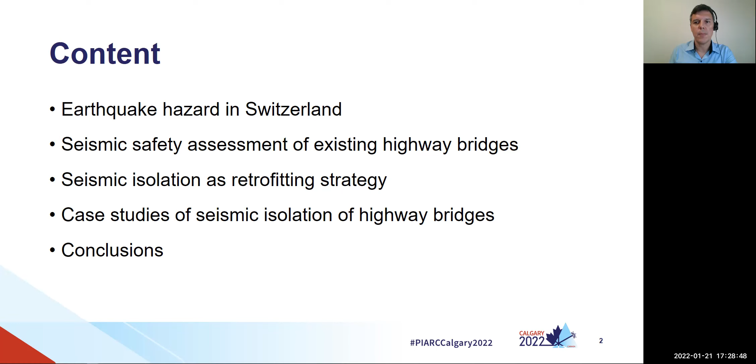At the beginning of my presentation, I will talk briefly about the earthquake hazard in Switzerland. Following that, I will present the main results of the seismic safety assessment of existing Swiss highway bridges that took place from 2005 up to 2020. Based on these results, we'll see why seismic isolation was applied quite often as a retrofitting strategy. Demonstration of such seismic isolation case studies will follow. I will end my presentation with the main conclusions.

The earthquake hazard in Switzerland is classified as low to moderate compared to other countries. The magnitude maps show how often an earthquake of or above a certain size is expected to occur within a specific radius and period. The presented map shows the probability of an earthquake with a magnitude of 6 or higher within a radius of 50 km within 100 years, which represents the approximate life expectancy of a human being and the service life of a bridge.

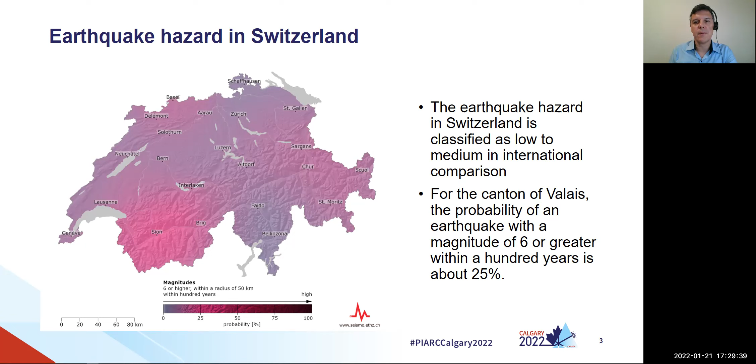The canton of Wallis in the south of Switzerland remains the region with the highest risk, followed by the city of Basel in the north and followed by the canton of Grisons in the southeast. For the canton of Valais, the probability of an earthquake with a magnitude of 6 or greater within 100 years is about 25%. The last earthquake of this magnitude occurred in the Upper Valais in 1946.

Modern seismic standards were introduced in Switzerland only after 1989, when most of the bridges in the national road network were already built. Only about 19% of the bridges were built after 1989, according to what are now considered as modern earthquake standards, whereas the remaining 81% were built before such standards came into force. Those bridges were not designed to account for earthquakes or were designed insufficiently. A number of existing bridges may therefore be insufficiently safe against earthquakes according to the current seismic codes.

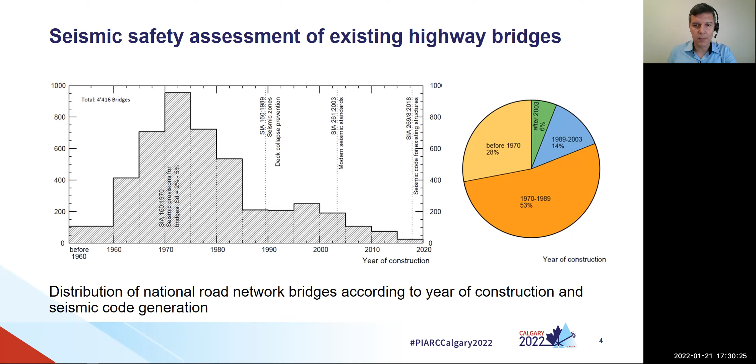In order to be able to identify these critical bridges with limited effort and therefore prioritize the interventions, a simple two-phase seismic assessment procedure has been developed. The Federal Roads Office began assessing the seismic safety of some 4,146 national road bridges using this simple procedure in 2005. In the first assessment phase, all bridges are roughly pre-assessed according to specific criteria using a checklist in the form of a flow chart as shown here.

The choice of the criteria for the preliminary check was based upon the experience of experts as well as on the feedback of the seismic performance of the different structural types of road bridges according to their national experience. Firstly, the considered object is attributed to a bridge class. If it belongs to a lifeline, it is checked in detail in a second phase. The same if its surface is more than 6,000 square meters.

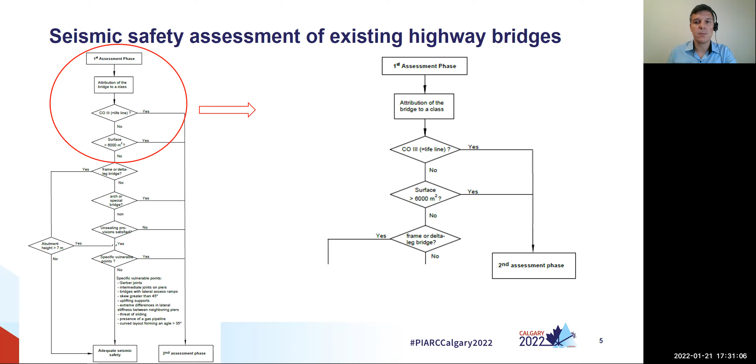If the bridge is an integral frame bridge or delta leg bridge and the abutments are less than 7 meters high, it is considered safe and further investigation is not needed. If unseating provisions are not satisfied, it's again checked in detail. Finally, a detailed assessment is applied if the object presents some potential vulnerable points, such as Gerber joints, skewed geometry with an angle of more than 45 degrees, intermediate joints on piers, major differences in lateral stiffness between neighboring piers, and other particularities described in more detail in the related Congress article.

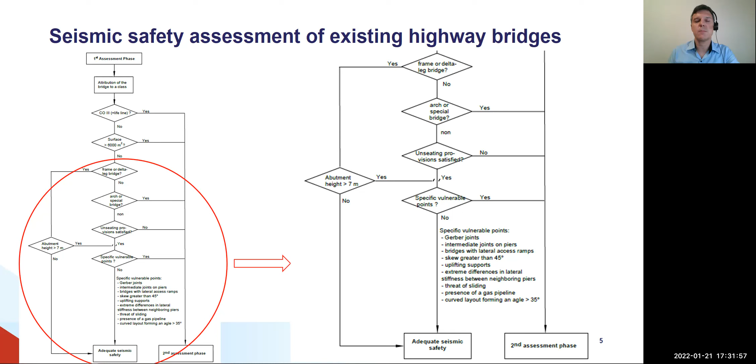From the total 4,146 national road bridges, 583 objects were classified as critical, the great majority of them being, as expected, bridges built before 1989, before modern seismic codes came into force. The detailed seismic verifications of 583 bridges have confirmed the necessity to proceed to seismic retrofitting measures for 242 of them, mainly bridges built before 1989. From these, for 96 bridges the retrofitting measures are already executed, and for the rest, 146 bridges, the retrofitting measures must be executed by the end of 2035.

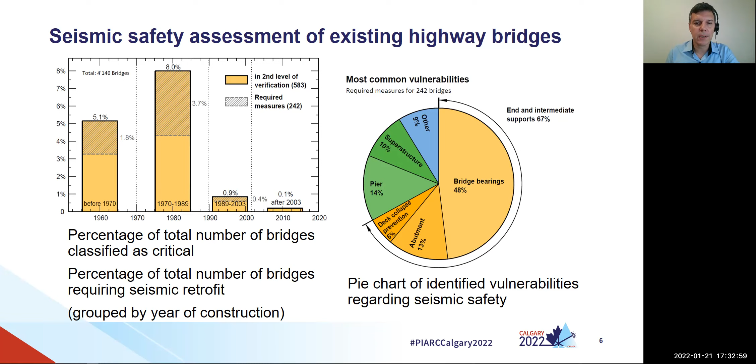As seen in the figure on the right, the expected damage to Swiss highway bridges after a seismic event, as defined in the current codes, concerns mainly the bearings of the piers for 48% of the cases, followed by retrofitting needs for the piers themselves for 14% of cases, and damage to the abutments for 13% of cases. As necessary interventions at end and intermediate supports concern 67% of the total retrofit cases, it may be convenient to think of seismic isolation as an appropriate retrofitting strategy.

To evaluate the more appropriate earthquake retrofitting method, one should optimally consider the interaction of three structural properties: stiffness, load-bearing resistance, and deformation capacity. The conventional traditional solution of the increase of the load-bearing resistance of piers, figure on the left, is often costly and not totally effective.

Specifically, the increase of the bending moment resistance of the piers by means of steel or reinforced concrete jackets leads to an increase of the stiffness and thus to a reduction of the fundamental period. This leads to further higher needed resistance than the one targeted initially.

A disproportional increase of the bearing resistance with regard to shear may decrease the ductility since failure mode passes from bending to shear. Furthermore, when it happens that the seismic action overpasses the design values, damage can be important in the piers and their foundation and can result in long-term interruption of the road network.

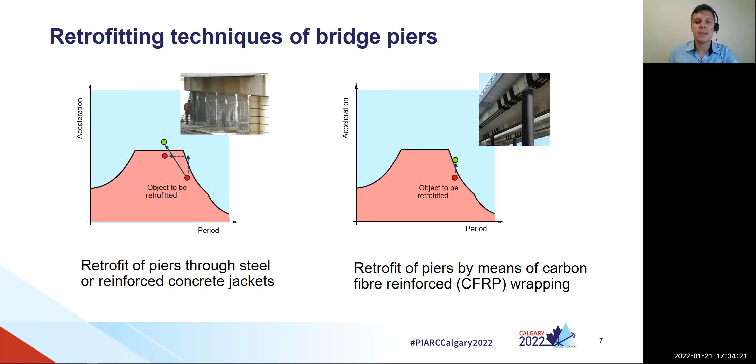Other solutions, as is shown in the figure on the right, such as the improvement of shear and bending resistance of piers, for instance by means of carbon fiber reinforced wrapping, may be convenient for specific objects, but since it does not apply to all cases, it may not be considered as a general retrofitting strategy. Again, despite the enhanced seismic response and the increased ductility, the dissipation is obtained by damage of the structural element, which may be undesirable.

Seismic isolation presents several advantages. It responds to the need to replace bearings, which was found to be the most common deficiency of the seismic assessment of Swiss bridges. Thanks to the combination of increasing period and increasing damping, seismic isolation results in significant reduction of seismic action and prevents unnecessary costly retrofitting of piers and abutments.

With seismic isolation, we have dissipation on the devices rather than on the piers. Seismic isolation limits damage by events not covered by the codes. Finally, it allows the structure to remain elastic or quasi-elastic, maintaining the functionality after a seismic event, and thus providing redundancy to the designed lifelines of the road network.

It presents, however, some disadvantages. It may also be costly in specific cases in short-term analysis, and large displacements may result in intervention in the expansion joint to assure the necessary deformation capacity.

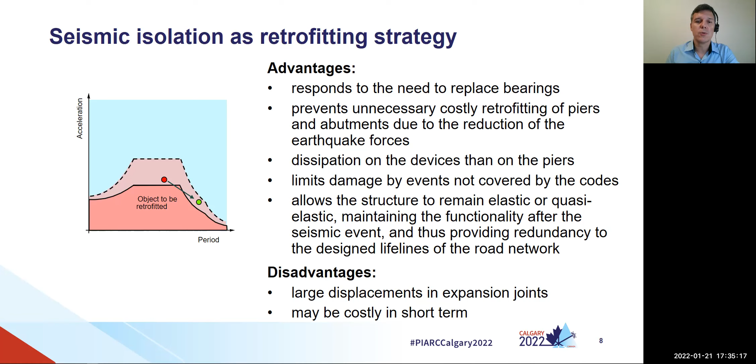The following slide shows two examples of this retrofitting strategy from real cases in Switzerland. The Brunnen Bridge on the N09 Highway formerly consisted of a continuous 5-span deck and then a 9-span deck with an expansion joint on intermediate support here in the middle. The two bridge decks were fixed to the respective abutments in the longitudinal direction. In the transverse direction, the bridges are restrained on all supports.

The total length of the two bridges is 270 meters. The spans are varying from 16 to 26 meters over the higher piers. The fixed longitudinal support of the two half decks on the abutments was in no way able to transfer the seismic forces. The very different heights of the piers and the abutments led to an uneven distribution of the stiffness, with the result that the very short supports were overloaded. In addition, there was a risk that the bridge girders would fall lengthwise at the expansion joint on the central support.

By installing high damping rubber bearings on the critical short piers and in the abutments, the longitudinal bearing system was changed from a fixed system to a floating one. By clamping the two halves of the bridge together at the original expansion joint in the middle of the bridge, the risk of the unseating of the deck has been eliminated. The new bridge assembly, lying over a total of 16 rubber bearings, receives reduced seismic forces longitudinally and transversally, thanks to the increased damping and thanks to the increase of the fundamental period to 2.5 seconds.

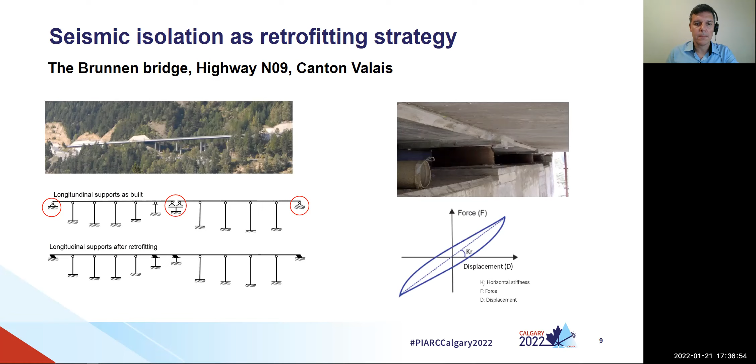The superstructure of the bridge comprises a box girder, the webs of which are raised and form a variable height trough structure above the deck. The bridge is supported on short circular piers founded on drilled piles. The abutments are shallowly founded.

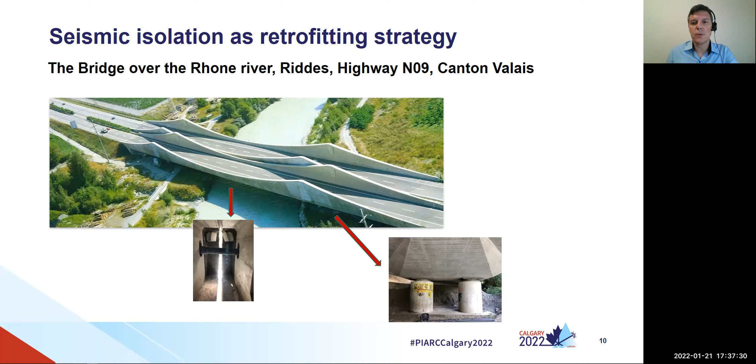The bridge was checked in 2014 according to the increased seismic standard requirements, resulting in a seismic deficiency of the guided bearings of the abutments, of the guided bearing of pier B2, of the fixed bearings of piers C1 and C2, as well as of the piers C1 and C2 themselves and their foundation.

The seismic conformity coefficient, that is to say the ratio of the seismic resistance versus the seismic action of an element, was lowest for the piers C1 and C2, equal to 0.28, one being the safe case. This value is much lower than the threshold of 0.40, which according to the Swiss seismic standards for existing structures means that measures had to be carried out directly in first priority.

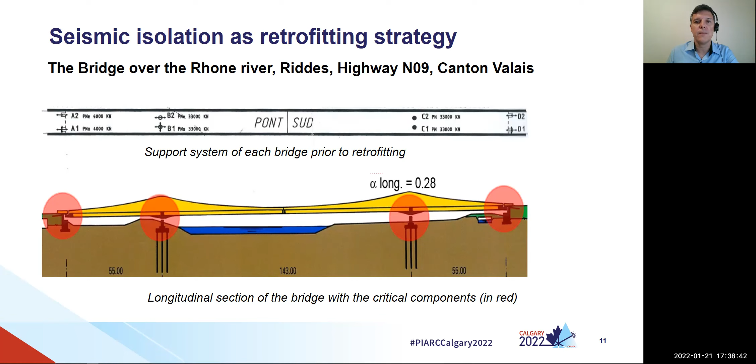In order to reduce the horizontal seismic forces and to avoid the extensive retrofitting measure, it was decided to seismically isolate the bridge. A new bearing concept was proposed to secure the structure and improve its performance in case of an earthquake. The proposed configuration contains a combination of fluid viscous dampers and pre-stressed damping springs.

A fluid viscous damper does not prevent very slow displacements, such as those due to thermal variation. It reacts in the event of an earthquake and dissipates a lot of the introduced seismic energy. A pre-stressed damping spring combines the benefits of a fluid viscous damper and the pre-stressed hydraulic spring. In normal operation condition, it acts as a fixed point. The pre-stress force must be greater than the forces to be withstood while in service, such as thermal expansion, braking, and wind. During an earthquake, a pre-stressed damping spring dissipates energy and then returns the structure to its initial position.

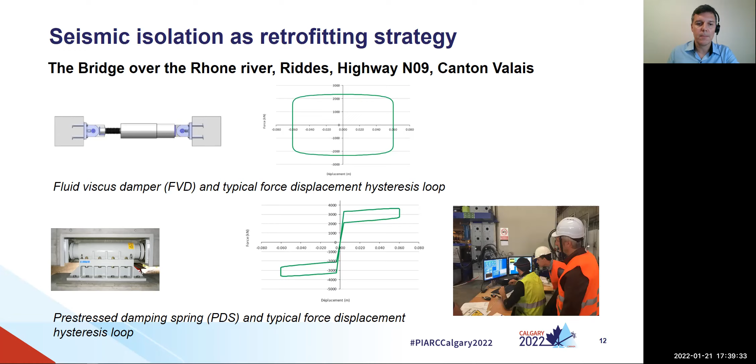Indeed, in order to avoid the very costly retrofit of piers C1 and C2 and their foundation, the study concluded that the longitudinal earthquake force should be distributed over the piers, the bearings of the piers B1, B2, and C1 and C2, rather than concentrating everything on the bearings of the piers C1 and C2 alone. Pre-stressed damping springs have a relatively low damping capacity compared to fluid viscous dampers. It's therefore more efficient to have the fluid viscous dampers in parallel with the pre-stressed damping springs in order to reduce the seismic action by increasing the effective damping.

The longitudinal pre-stressed damping springs are therefore positioned in the head of piers C1 and C2, which remain the fixed point of the structure in service that takes up the braking forces, while the fluid viscous dampers are positioned on bearings B1 and B2. This makes it possible to distribute the seismic load and relieves bearings C1 and C2 under seismic excitation in longitudinal direction.

In transverse direction, the pre-stressed damping springs are doubled on the piers compared to the abutments. This is because the moving mass of the pier is much greater than the moving mass of the abutments. The pre-stressed damping springs in the transverse direction can help to reduce the transverse deflection of the deck under transverse seismic excitation and avoid the shock that occurs at 50 mm of lateral displacement.

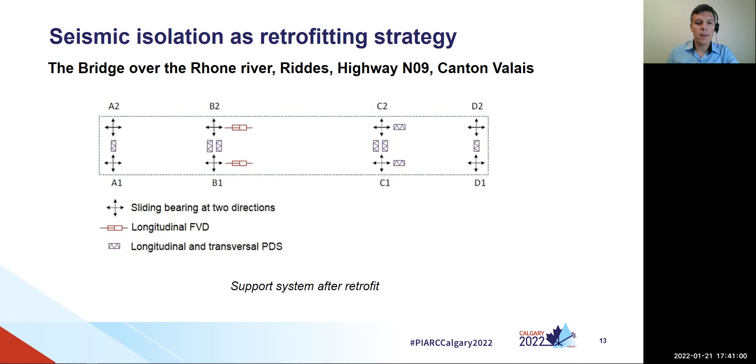It's worth mentioning that for the existing bridges, the position of all special seismic devices requires the conception of a steel structure. For new bridges, this can be optimized early in the design of the support system of the bridge.

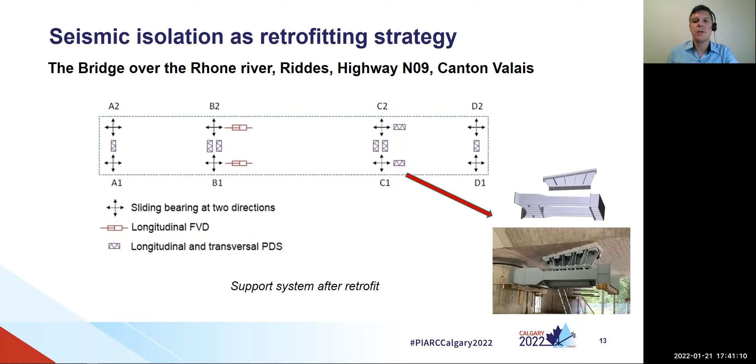The fundamental period of the structure for the seismic excitation in the longitudinal direction increases from 1.16 seconds prior to retrofit to 2.09 seconds after retrofit. The combination of increase of effective damping and increase of the period results in a reduction of the seismic actions by a factor of 4. Consequently, a retrofit of the piers and their foundations is avoided.

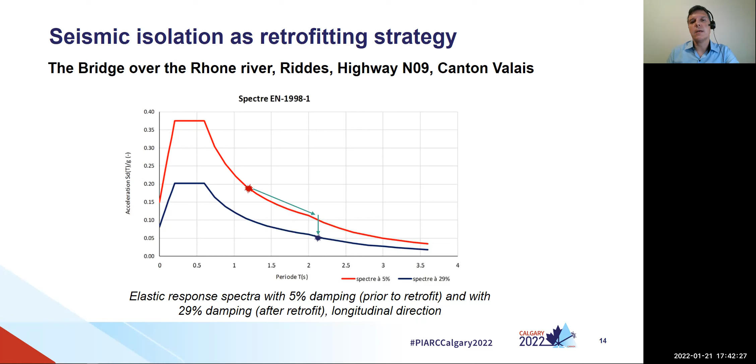In the transverse direction, the dynamic analysis is more complex. The bending deformation of the deck slab reduces the effectiveness of the isolators, and the effective damping is limited to 7.1%. However, the fundamental period for the transverse excitation is getting larger, from 1.12 prior to retrofit to 1.88 seconds, and thus we have a reduction of the seismic action.

Here now we come to the main conclusions. The seismic verification of the national road bridges has shown the deficiencies. Deficiencies concern mainly the bearings of the piers and the abutments, and secondly, the piers themselves. This resulted in many cases in the choice of seismic isolation as an effective retrofitting strategy.

Seismic isolation can be applied in most cases without interruption of traffic and results in an important decrease of the seismic action due to increased damping and increase of the fundamental periods. When displacement is not a restraint, high damping rubber bearings or lead rubber bearings are often used devices. When it's needed to restrain displacements, other devices such as pre-stressed damping springs and fluid viscous dampers can be the convenient solution.